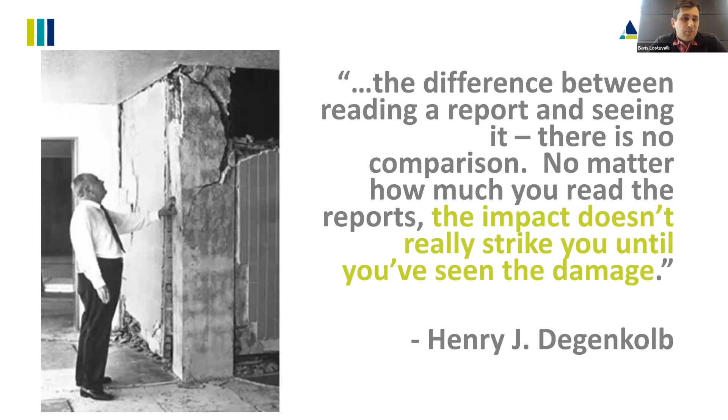Again, lots of words of wisdom, wonderful engineering insight, but that's really the difference. That's really why not only the Degenkolb team, but a number of other teams from the Bay Area, from the US, traveled to Turkey to really see what happened and how it compares to what they would predict from the report.

Again, the presentation outline is a quick introduction, and Adam and Jennifer will cover the ground movement and the typical construction practices in Turkey. We'll share with you the performance of the buildings of various product types. We will share some of the conclusions and lessons learned, and then we'll shift the conversation more to what it means to California. Obviously, we are expecting our big one sometime on the horizon, and how do we get ready for that risk? And in response, what can we do as an AEC community to better get ready and prep for the next big one here?

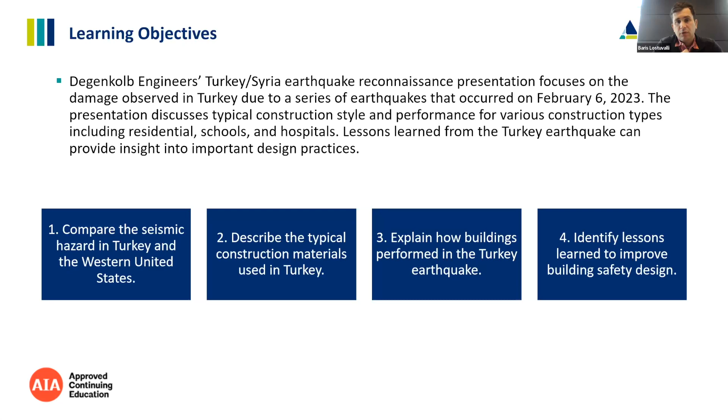And the learning objectives are really comparing the seismic hazard in Turkey and the Western United States, describing typical construction materials used in Turkey, explaining how the buildings performed in the Turkey earthquake, and identifying the lessons. And again, the learning objectives really are about unlearning what we know, revisiting our assumptions and relearning based on what we see in this kind of devastating event.

So, introduction to Turkey. Again, that's my homeland. Turkey is at the crossroads of east, west, north, south. It has been a crossroads for centuries. It has many different facets, the seaside, the archaeological sites, the historical sites, so a great place to see. And when you go to Turkey, you're gonna see many old structures still standing intact, doing fine for centuries, for millennia. So the question is, if they could stand this well after this long, why are we experiencing the devastation in the southeast of Turkey?

So with that, here's a quick summary. The Turkey earthquake is really two pretty big earthquakes, the 7.8 and then the 7.5. And these two earthquakes came about 9 hours apart, which really compounded each other. After the earthquake, close to 18 million people in Turkey and Syria have been impacted. The official death toll is about 55,000 and over 130,000 injured.

Millions and millions have been displaced from their homes. Probably more than 50,000 buildings are now in ruins or too damaged to enter. And if you look at the financial impacts, the UN is seeing over $100 billion cost impact after the destruction. So lives and the economy have been severely impacted after the earthquake.

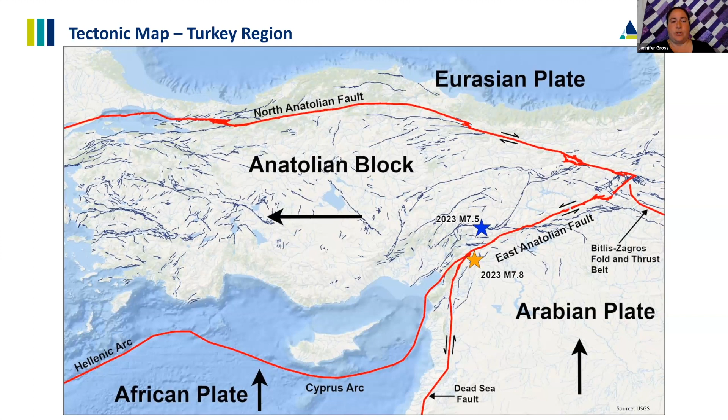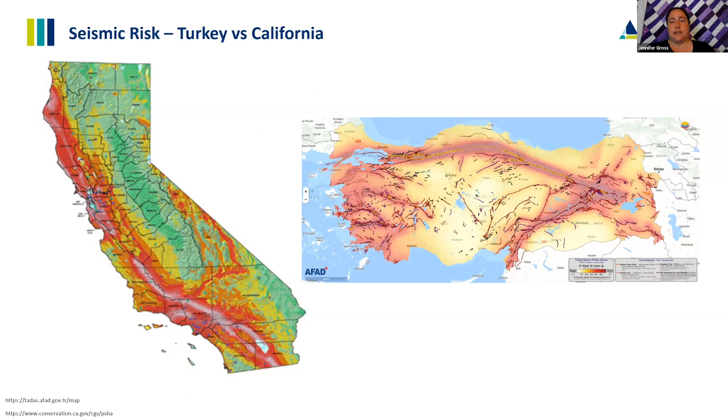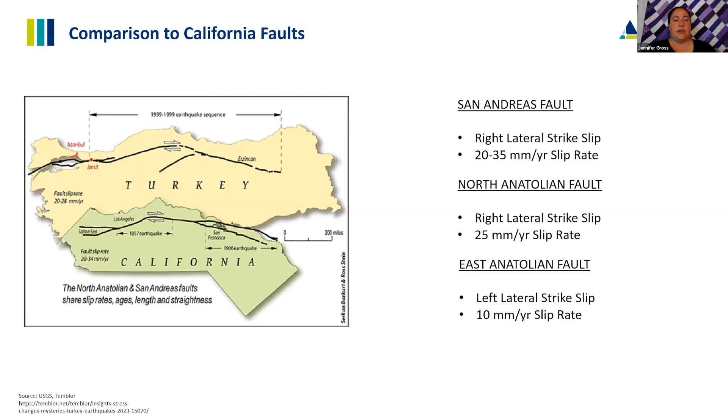Again, two very large cities that are due for large earthquake events. The East Anatolian fault that this earthquake occurred on is kind of similar to the Hayward fault in the Bay Area.

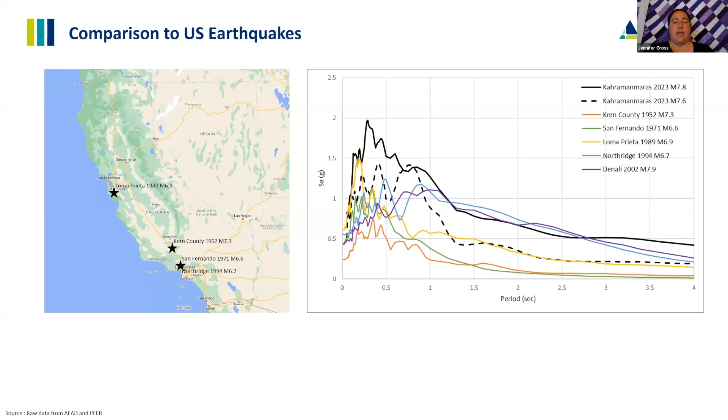What we really want to point out here is if you notice that black solid line has a higher y-axis value than any of the US earthquakes. So if you've been through one of those earthquakes and felt that shaking intensity, imagine what it was like in Turkey. This is a response spectrograph, so similar: period on the X, acceleration on the Y.

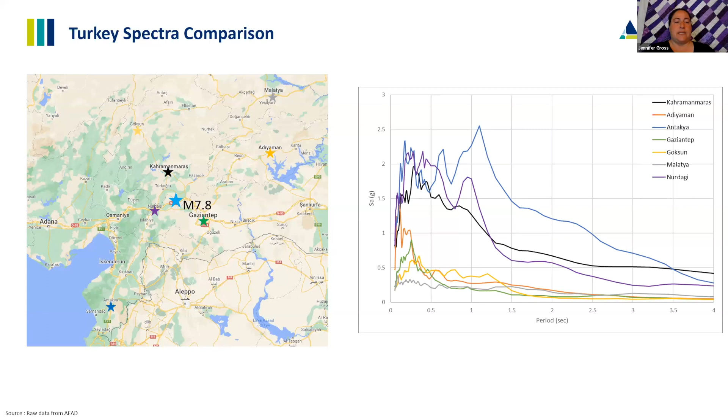Conversely, the green star for the city of Gaziantep is where we stayed during our trip. It had very minimal damage. Life was pretty much back to normal there. And really what this shows is that epicenter doesn't always mean the strongest ground motion. There's a lot of impact of soil conditions.

So what we want to talk about is the fault rupture that happened. And this was a very long fault rupture for this earthquake. It was about 200 miles long. So essentially the distance from San Francisco to San Luis Obispo, just trying to give context to the magnitude of this fault rupture. So not just buildings were impacted, the ground did actually move during this earthquake. And so that was evident in many places we visited.

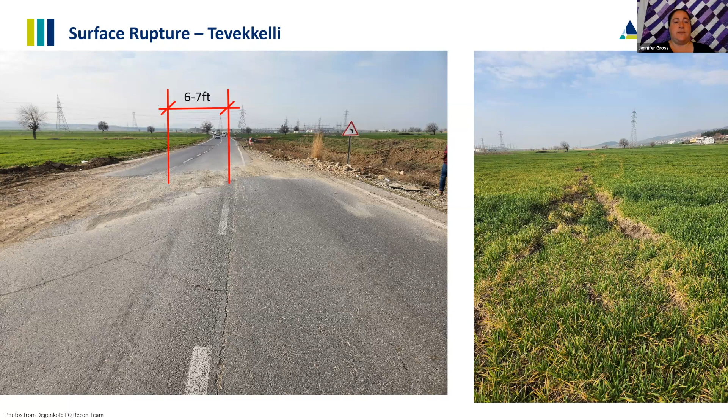So this is another example of that same movement of the earth in Hassa. And in the picture on the left, you kind of see that pile of rubble almost follows the rupture, the movement of the ground, just taking away everything in its path.

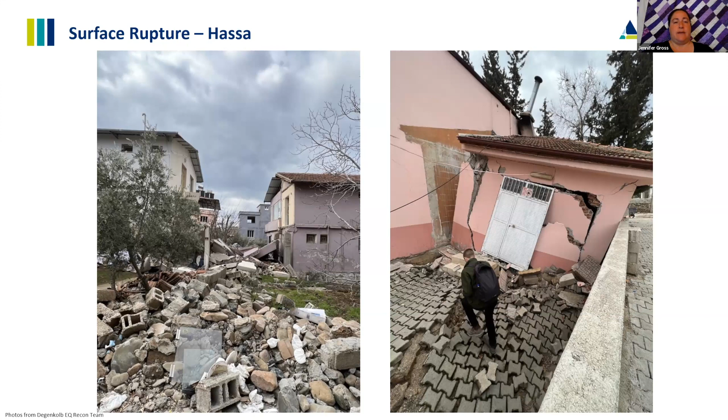And for the picture on the right, what's unique is this pink building is a school, and this rupture of the earth happened right between the main building and the mechanical building you see pulled away. And where Adam is walking used to be an area of flat pavers. And we saw movements horizontally of about 8.5 feet, but also 42 inches vertically, just to imagine the force and energy it took to move the earth that much.

So this is a unique area. We're not sure if this was really surface rupture or a landslide from the earthquake, but it's in the town of Tepehan. And what's unique is this picture that you're seeing is the after effect of the earthquake, but actually before it, this olive grove was all flat at the same elevation.

And according to CNN, this crevasse that occurred is 130 feet deep, 900 feet long, and 160 feet wide. When we were there in person, it was so huge, it was really hard for us to take a photo that did it justice.

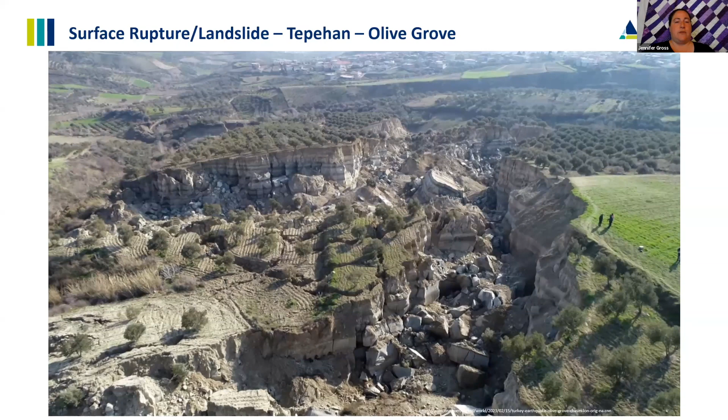So one of the other unique ground conditions that we saw in the town of Golbasi was liquefaction.

And so liquefaction is really when there's a high water table and loosely packed sediments. What happens is if there's a really strong ground shaking, it can actually cause the soil to lose its strength. And so in this town, for instance, there's a lake nearby, so we believe there's really high water tables. So what happened is when the soil doesn't have any bearing strength anymore, it kind of gives out.

And so what happened for this building is that it rotated 45 degrees and was really just stopped by the building behind it. And the picture on the left, what you're seeing is just what was buried under the earth before, the foundation, the bottom of the building. And the unique thing is that if you look at the windows, if you look at the building, it actually looks very well intact, just completely rotated.

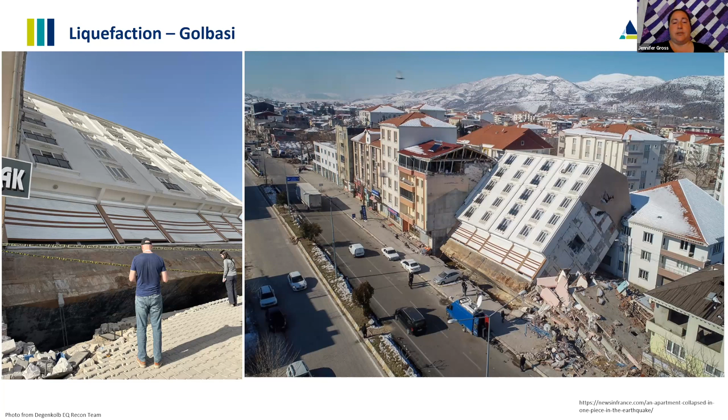And now I'll pass it back to Adam to talk further about our trip.

Thanks, Jen. So I'm going to talk a little bit about the building construction in Turkey, and then also about some of the damage. And the best place to start is with the picture you see in front of you, which is a very ubiquitous and very common construction type in not only Istanbul, but greater Turkey, and especially southern Turkey. This is a residential building. They're typically 5 to 12 stories tall.

They are concrete frame buildings where you have concrete columns, concrete beams and concrete slabs. And then they are infilled with brick infill or masonry infill. They don't use metal studs or wood studs like we do typically here in the States. So these create very, very heavy buildings.

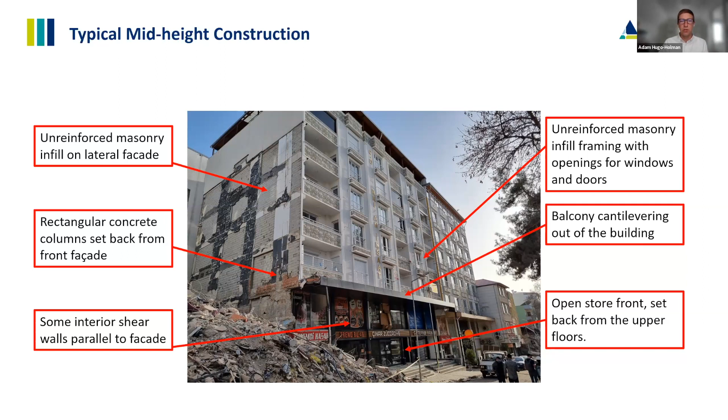The other thing to note about it is the open storefront below. This is also very common. They usually have a restaurant or retail downstairs, and similar to San Francisco, you want that space to be well lit with lots of light. So there's often lots of glass, and that heavy amount of walls and construction sort of disappears and it's just columns. And so you create an irregularity or a soft story in this ground floor, and it makes it very susceptible to earthquake damage.

Here's just a picture of the three varieties of infills. Again, they don't use metal studs or wood studs. We were joking with another engineer, go to their version of Home Depot and you won't be able to find a typical wood stud. You find blocks like this.

There's three varieties. There's a clay infill, which is a very light, brittle, sort of what you see up on like a tile roof. There's aerated block, which is basically very light concrete. And then the last one is the CMU block, concrete masonry block. And they will use these often interchangeably, but the takeaway is that they make these buildings very, very heavy and very, very stiff.

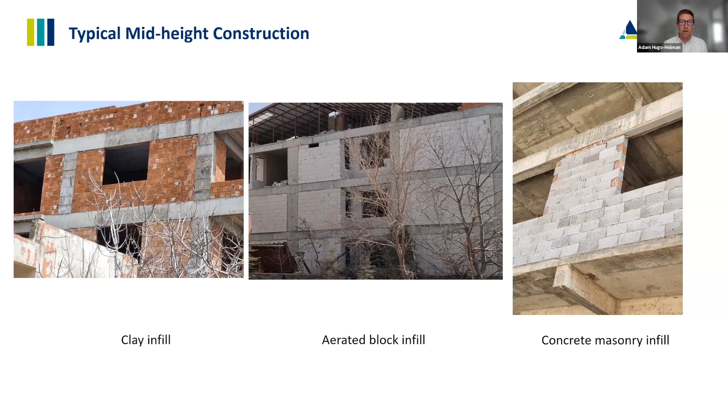Now let's talk about codes. There's a lot of similarities between California and our seismic codes and the Turkish seismic codes. There's a lot going on this slide, I apologize, but let's focus in on the horizontal line that runs across the middle of the page. So in the 1930s, Turkey, following a large earthquake, implemented their first seismic code. Similar to the United States, similar to California, where we implemented our first seismic code in the early part of the 20th century.

And there were multiple updates through the first half of the 20th century, all the way up until 1975, at which point they introduced seismic detailing, basically the way that we would tie bars in their concrete buildings. It was introduced, it wasn't enforced. So the implementation of it was mixed. And there were no real updates of that code until approximately the year 2000, at which point they switched to more US-based codes. They used ASCE 7, which is what we use here in the States, and have now been implementing code updates on a 10-year basis. So they had one in 2000, 2010, more or less, and just recently.

The thing to think about with this, why it's important, is the blocks on the bottom side of that chart show rough percentages of buildings that are in place now. And approximately 60 to 80% of all buildings were built prior to 2000. So the chance of having buildings that have zero seismic detailing or minimal seismic detailing is very high. I saw another chart yesterday that talked specifically about residential buildings where it was more like 50% of the buildings.

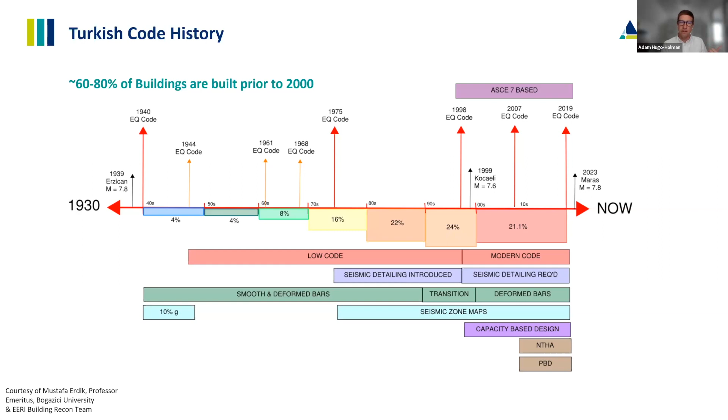In Turkey, smooth bars were in wide circulation up until the 90s, and then phased out through the 90s, and now they aren't really used. So any building built before 2000 has the potential risk of not having proper detailing and potentially smooth bars, and that combination can be very deadly.

I think collectively, within our team and with others we've talked with, we believe this number is probably quite low. Based on our brief walk through southern Turkey, we think the number is more like 25 to 30%. You need to let that sink in for a second - that's 1 in 4, 1 in 3 buildings in a very large swath of area that you will lose. And really, the evidence of walking around bears it out. It was absolutely devastating to so many communities across southern Turkey.

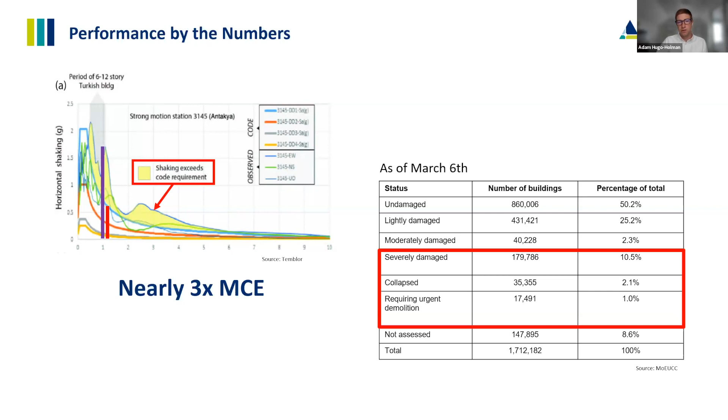So now talking about the performance, I'll go by building type. Residential buildings by far performed the worst. As I mentioned, the unique aspect of the force demand and the detailing is why we think these buildings performed so devastatingly.

The reasons why these did so poorly: the earthquake demand was so much higher than the design, the potential for irregularities with ground floor storefronts or restaurants, the lack of - or potential lack of - detailing given the age of construction. And there were instances, as reported in a lot of news media, of poor construction. It led to real devastation. This earthquake happened at 4 a.m.

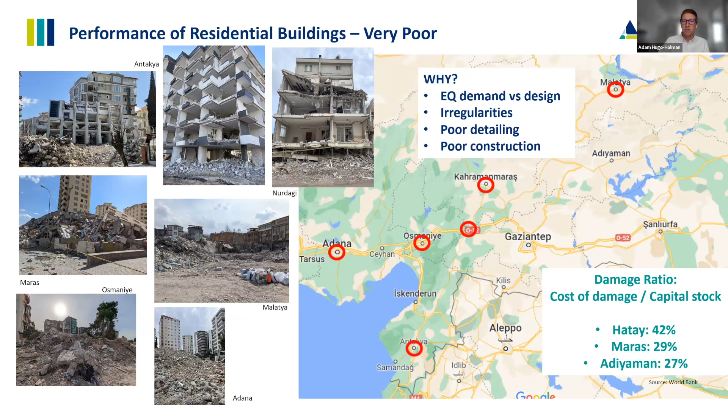You have to imagine people were sleeping in their beds, getting up, having a cup of coffee, getting ready for the day, and the world crumbled around them. It happened in 90 seconds, this level of devastation. It's something that I don't think, and I'll speak for the people that were there, you cannot comprehend. It's just unimaginable.

One of the bright spots, I think, was the performance of school buildings. A couple things to highlight about schools in Turkey, and especially in southern Turkey. I was not familiar with this practice here in the States. It's typically a template design, given that the code has a couple of designs that people can just use off the shelf. And from what we were seeing as we walked around all these cities is that it was pretty well implemented. A lot of these buildings were the same building, kind of copy and pasted, and they performed actually fairly well.

So you ask yourself why. Well, one is, there's school buildings, so there's lots of classrooms, so there's lots of walls, lots of transverse walls, typically a corridor down the middle, which had lots of walls. So there was a lot of strength and stiffness in the buildings. They didn't have any irregularities. They didn't have the ground floor storefronts. They were just very typical buildings. We sort of joked it's how an engineer would design a building, not an architect. It was just a very boring building.

They also usually had better construction quality. Just having the visibility of it being a school in the center of a community, there were more eyes on it, and likely it was constructed in a much better way. And lastly is back to that response spectrum - they didn't see the level of forces based on their height that the residential towers have.

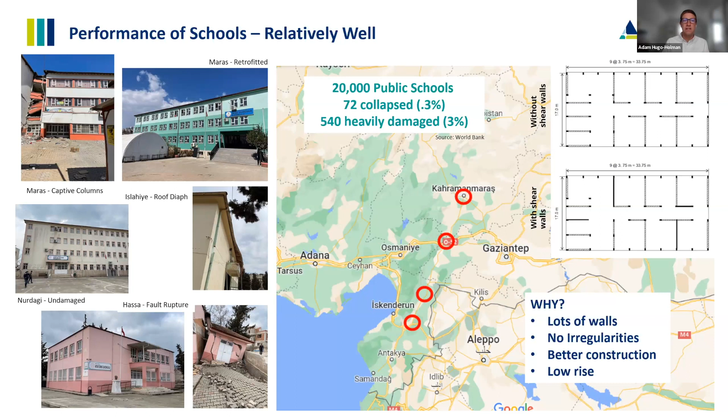One last thing I want to highlight, and this was sort of a bright spot. The green building in the top left was a building that had just been retrofitted, and it was in the town of Maras, and the town had been completely devastated. We saw this building, and it stood out to us, and we said, what's going on here? The building had just been retrofitted, and the principal and the school officials were so excited to show us the building, as they should be, because it was great to see that seismic design can work. When you implement retrofits and fix these older buildings, they can perform really, really well. It was really great to see.

Government buildings, also similar to school buildings, generally performed fairly well. Again, you ask yourself why. They didn't have the irregularities typically. They were just very typical buildings all the way down to the ground, no storefronts. They were also very often newer buildings - they looked like their construction was probably 5 or 10 years old, so incorporating the new seismic designs. They were obviously engineered by structural engineers. Again, more scrutiny so the construction quality often appeared to be significantly better.

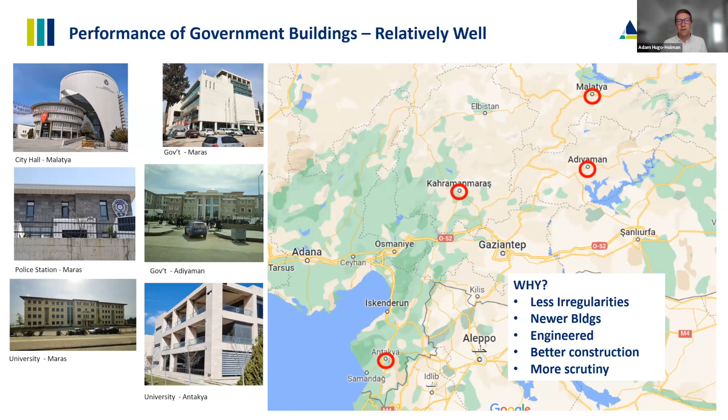The only building that we saw that was abandoned was at the top left in Malatya, but that was more because there's a big architectural feature that had some slight damage. The building itself looked to be in very good shape.

The other thing I want to talk about is infrastructure. This is a slide I got a lot of this information from the EERI team, which is a research institute based in the East Bay. They sent several teams, surveyed a lot of the infrastructure - bridges, dams, electrical power lines. The general synopsis was that overall they performed fairly well. I think only one dam had to be drained or have its water level lowered. Some experienced damage, but nothing severe. A lot of the power lines were still standing. The only time they fell was when there was a surface rupture underneath them, or a building fell into the lines.

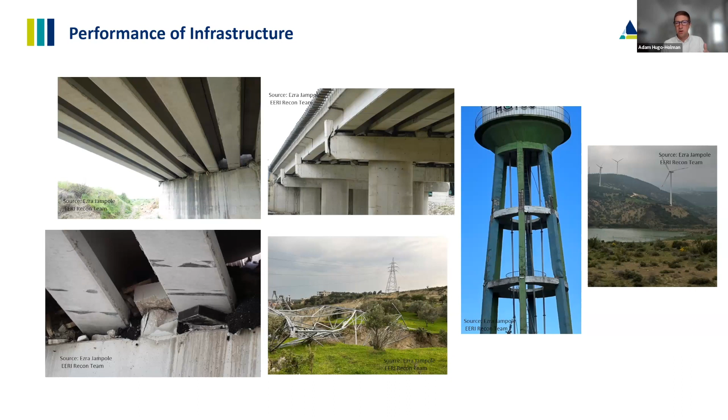When we were there, cell service was good. Roads were sort of back up and running. We didn't have any issues. There were some landslides that inhibited some traffic, but generally the infrastructure seemed to perform fairly well.

Okay, now I'm going to hand it back over to Jen.

One of the building types that we really wanted to dig into when we were in Turkey was hospital buildings. Between the two Degenkolb teams, and an EERI-focused hospital building team that one of our colleagues was on, we visited 31 hospital buildings.

So what you can see on the map is the color coding of our observations of damage for these buildings.

Hospitals are very similar in construction to other types of buildings. They're mostly concrete frame or shear wall with masonry infill. Modern Turkish code does use a higher importance factor for hospitals, just like we do in the United States.

One thing we thought was really interesting is that base isolation got mandated about 10 years ago for new hospitals with more than 100 beds.

As you can see with the chart on the bottom right, looking at the damage, the base isolated buildings, as we would expect, did very well. But also important to note is that the majority of the buildings we observed, regardless of base isolation, fell into that no damage to moderate damage range, which again shows that the higher importance factor and the importance of the structure really helped with well-performing hospital buildings.

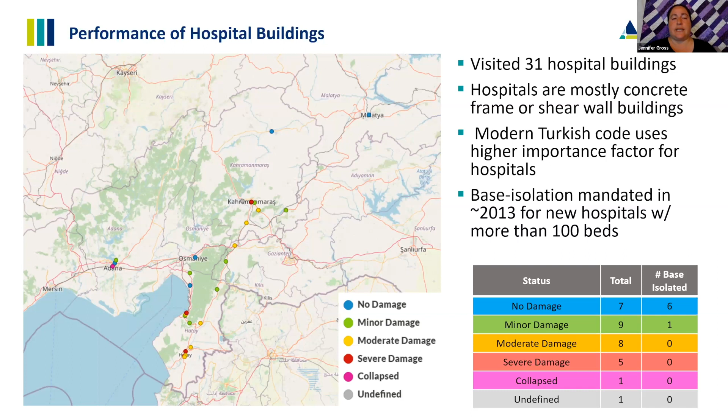Now we just wanted to go through the next couple of slides, some case studies of the hospitals we visited.

This hospital in Malatya is the University Teaching Hospital. It's 6 stories with 2 basements, and it is base isolated. It had little to no structural damage, but there was some non-structural damage.

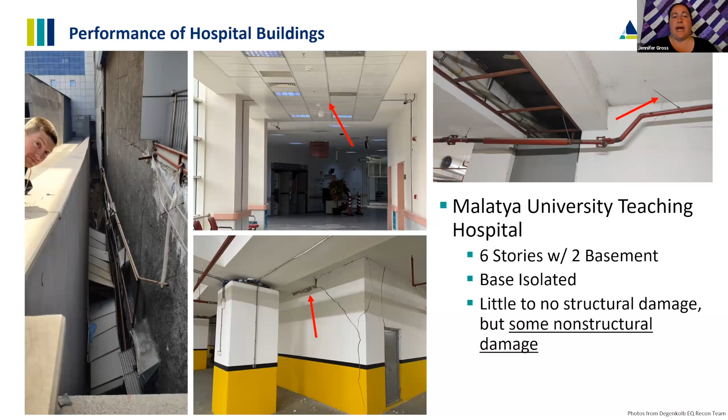The picture on the upper right is of a fire sprinkler line crossing what we call the moat - that open area looking ceiling is where the base isolation is, giving it movement. What happened is while the fire sprinkler line itself was given the ability to slide and move as it wanted with the building, putting the hangers on each side accidentally restrained it at each end. So when that fire sprinkler wanted to move, it ripped the hangers off the attachment.

Another hospital we visited was in Erzin, a 4-story hospital with 1 basement. We saw some structural damage, but more so a decent amount of non-structural damage.

There were some pipes that broke; the picture on the upper left shows the clay tile sliding off the high roof and falling onto the low roof. The picture right below shows the gable masonry wall collapsed, and the roof itself didn't really have a great lateral system. Also all the equipment attached to it wasn't braced.

Some unique highlights: in the picture center bottom are the elevator motors, which weren't anchored, and we would have expected to see a lot of movement and sliding, but we didn't. The photo on the upper right shows ceiling damage, which was typical.

But overall, most of the damage is non-structural or damage you'd think is repairable. But the building itself was inoperable - it was abandoned.

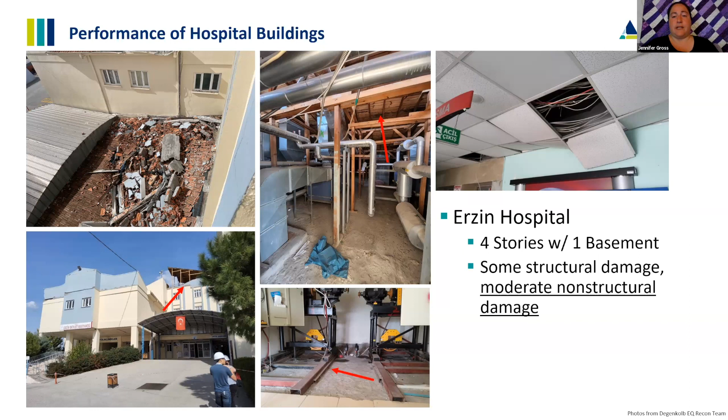From talking with the security and maintenance team that was there, it's likely that the building is going to just have a new hospital built next to it that's a 50-bed hospital, so they're not really trying to salvage this building. This hospital is in Marash, and it's 7 stories with a fixed base.

It had moderate structural damage, but significant non-structural damage to the facade and the masonry walls. It was evacuated, and when we were there a month later, it was still inoperable. This picture shows a zoom in, especially at that lower level, of the damage to the facade and infill walls, as well as air conditioning units that fell off the wall onto the ground.

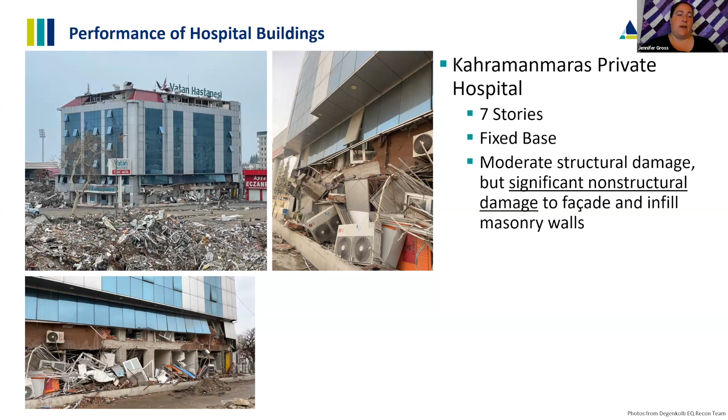This hospital in Turkoglu was 4 stories and fixed base. What was really unique is when we got there, we could tell the building had been abandoned and no one was there, but we really didn't see any structural damage. The story was more when we were able to get inside the building and see the severe non-structural damage.

These photos conveyed something that really shocked us, everything that had been attached overhead was on the ground. All the heavy masonry infill walls had shifted onto the floor. Some of the stairs were even impassable.

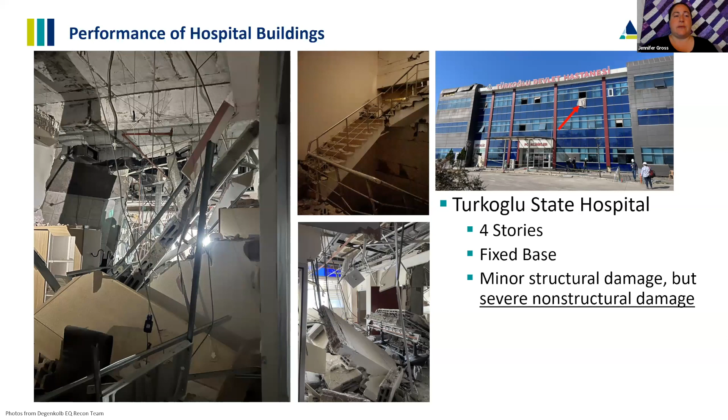What this means is that, like where you can see the photo with the arrow, there's a sheet hanging out the window. We heard that occupants had to rappel out the window to get out due to blocked egress paths. So this hospital was inoperable because of its non-structural performance.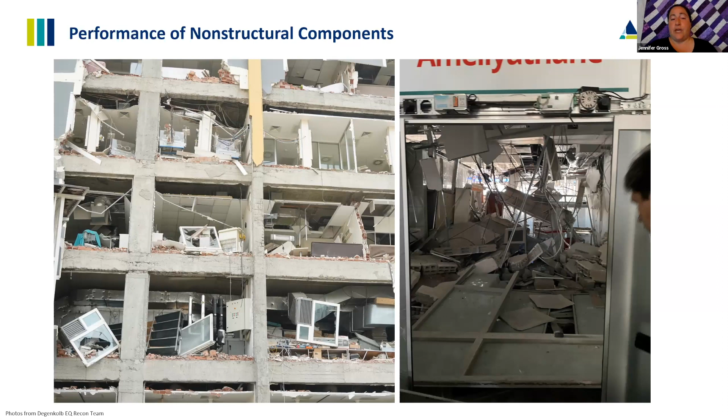Both of these pictures again show non-structural component issues within hospitals, ranging from equipment anchorage issues to suspended ceilings and infill wall damage. What we want to drive home is that because of non-structural component damage and failures, these buildings are likely to be demolished, even though the structure itself performed fairly well.

Now I wanted to wrap up with some of our conclusions and findings from our observations. One of the things we wanted to touch on was soil conditions. While there are bad buildings that will suffer damage, these high concentrations of damage that you can see in these maps really point to larger issues with soil conditions and pockets of poor soil. So again, soil conditions make a big impact on building performance.

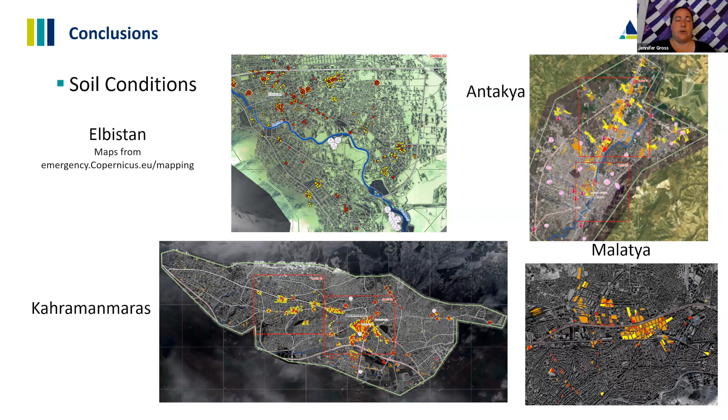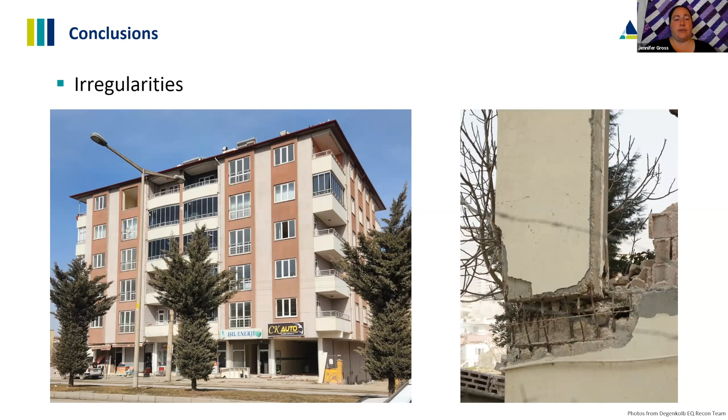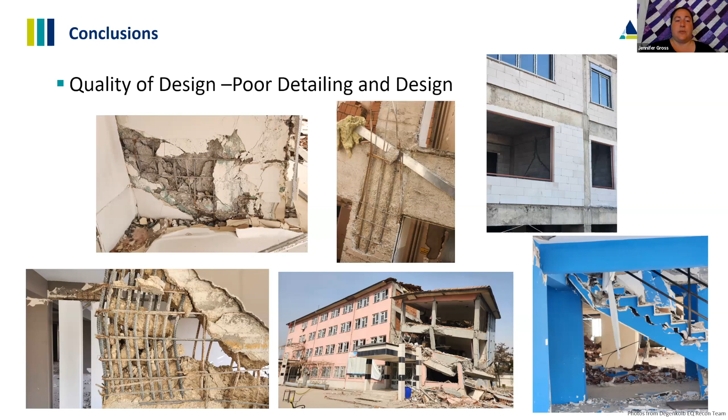Again, this drives home the importance of good detailing and design. We saw evidence of poor detailing and design, whether that's how long the rebar was, how well the rebar was confined, or how well it was detailed. The important thing to think about is that in the US, we've changed our code since the 70s in terms of detailing and how we confine concrete. Older buildings don't have the same level of detailing that a code-level building built now would have, so newer buildings are detailed better, both in Turkey and in the US.

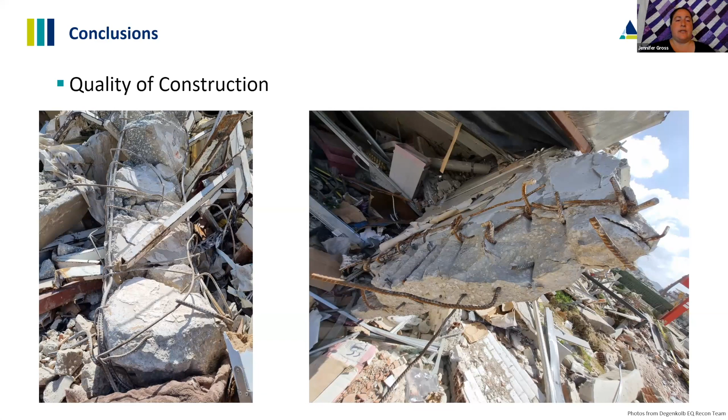We wanted to show some photos noting issues with quality of construction. In these photos, what you're seeing is that the concrete and the rebar should really act as one and be adhered to each other. In these photos, you see the rebar almost just rips right off of the concrete.

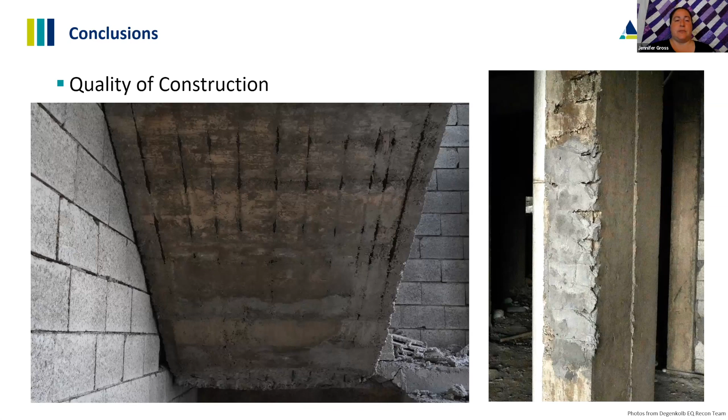In these photos, while these elements are intact, the fact that you can see the rebar peeking through shows it doesn't have a lot of clear cover, which means it's really susceptible to elements, water, and damage, meaning the rebar's capacity and strength is not what was designed for.

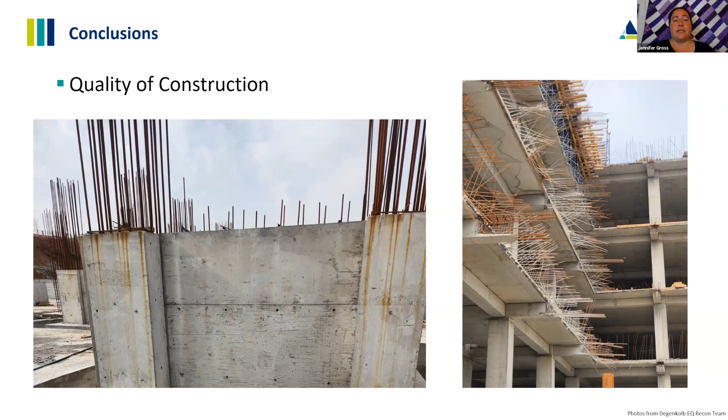Even this base isolated hospital building that we saw under construction, you can see that the rebar already has rust and damage to it before the building's even finished being built. And for quality of construction, we also saw a plastic bottle basically poured into the concrete column while the building was being built.

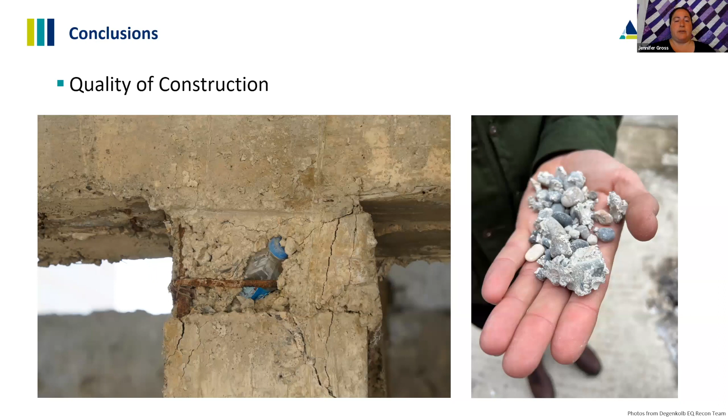The photo on the right is actually, Adam took a piece of concrete and crumbled it in his hand, leaving just a couple pieces of the aggregate rock. So just not the quality of concrete we would have designed for.

So again, this shows the importance of thinking about and being concerned about non-structural damage. Non-structural damage is the reason some buildings are likely to be demolished. In the US, especially for hospitals in California, we're very careful about bracing and anchoring equipment and non-structural components, but that's not necessarily happening for other building types, maybe office space. And even for buildings where non-structural stuff is being anchored, what's the level of inspection of that versus the structural components? Now I'll pass it back to Adam.

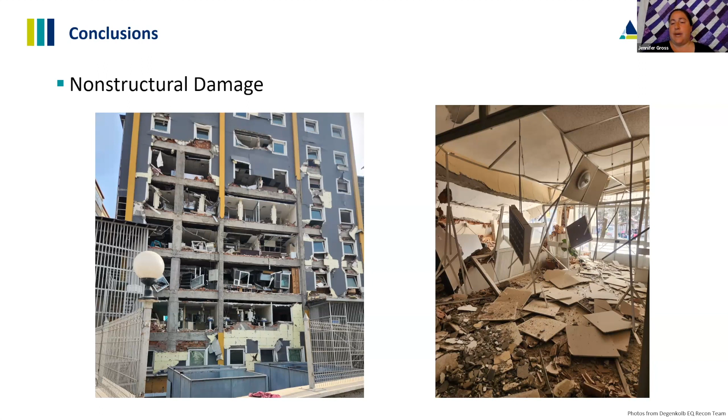Thanks, Jen. I think it's important to ground this back into the West Coast and understand what this actually means for us. We often think about earthquakes happening in different parts of the world and push it off, thinking that doesn't really apply to us. I think it's important that we take a second to reflect on what the risk is here in the Bay Area and especially in Southern California.

The USGS has done several studies on the potential for and likelihood of earthquakes happening here in the Bay Area, and as you can imagine, the risk is very, very high, and not for very small earthquakes—these are very large earthquakes, and the potential for them is very large. I think we need to recognize that risk and realize an earthquake could happen tomorrow. Are we ready for that?

The other thing I think is important, tied to what happened in Turkey, is this idea of the 1-2 punch, where two earthquakes happen in rapid succession. In Turkey, they were 9 hours apart. In the Bay Area and Southern California, it isn't really one single fault that goes through our area—it's a multitude of faults. In the Bay Area we have the San Andreas and the Hayward fault, and those interact with each other. As one releases stress, it could redistribute that stress to another fault, giving the potential for something as devastating as what happened in Turkey.

I think it's really important to think about this, because that risk is real, and the potential for a 1-2 punch similar to what happened in Turkey is something we need to acknowledge.

The other thing we often try to dismiss is that maybe the construction type and the poor inspection or construction quality that happens in Turkey isn't something we have to worry about. We have a much stronger construction industry, and we do, but there are still old buildings that pose a risk in our society. The Chronicle published an article shortly after this earthquake discussing that in San Francisco alone there are 4,000 non-ductile concrete buildings. Those are very similar to what we saw in Turkey, these concrete-heavy buildings, and they pose a real risk in our society.

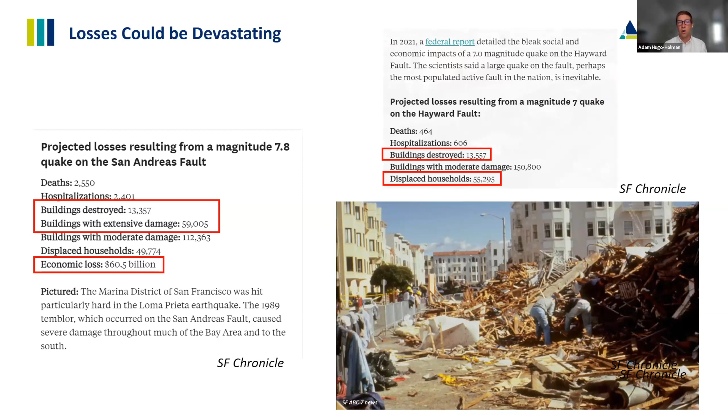Turkey and the United States, and California specifically, have a shared history of earthquake damage. We learn from each other. A lot of great structural engineers live and work in Turkey and also come to the United States, and we go there and we share a lot of the similar design philosophies and work together.

And because we have this shared risk, we've experienced earthquakes for a very long time, and we continue to try to figure out ways to design for them. We're tied at the hip in the sense that we need to work together and learn from their earthquakes in the same way that they learn from ours.

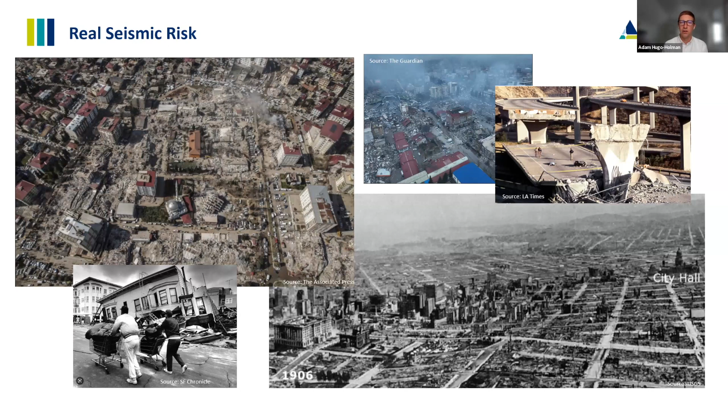The last portion of this presentation is more about what the broader community can do. What do we think about, and what do we take home from the lessons of this earthquake and incorporate into our practice? And I think the first one is working together. I think too often in our construction industry, we see each other as adversaries, and we try to sort of defend against what others are telling us to do. And I think that's not really the spirit.

I think we need to continue to work collaboratively together and innovate in how we can improve our construction practice and industry to make our buildings safe. And that's working on codes, that's having high quality contractors, working with our engineers, and working together to make sure not only that we have high seismic performing buildings, but also doing it cost effectively, being able to innovate our way into making better buildings for our communities.

The other big takeaway was caring for all buildings. I think during the pandemic, we sort of reevaluated what the word essential workers meant. And I think we need to think about what that means for our buildings as well. I think we need to reevaluate what an essential building is. We've spent a lot of time and money, and it's been well spent, on protecting our schools and hospitals.

And in this earthquake in Turkey, we saw those buildings often perform very well, but they were often surrounded by a community that was completely devastated. And so they had nobody to serve. What good is a school if there's no kids that can go to that school? And I think we need to think about that here. Do we design our buildings that are our homes or our offices or our grocery stores and think about what their seismic performance is and what it means if they were offline for a very long time after a big earthquake?

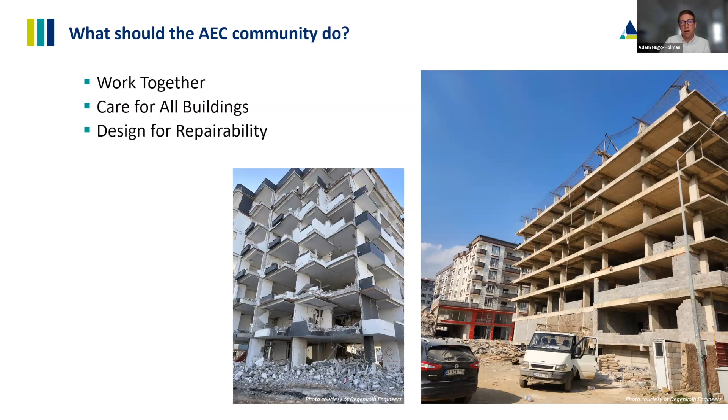Which actually ties to my next point here, which is understanding the risk. I think there's a big disconnect between the structural engineering community and the broader community. The code requires buildings to be life safe, and we design for life safety. And what that means is that you can get out of the building safely after an earthquake. My perception is the broader community thinks that their buildings will be back up and running shortly after the earthquake.

There's thoughts of, well, we made it through Loma Prieta, we did okay, and my building was designed to code. And not taking into account that, one, the design parameters that we use will potentially have your building out of service, not working after the earthquake happens. And that's if it's built to a current code; if the building was built in the 1970s, you have a much higher risk.

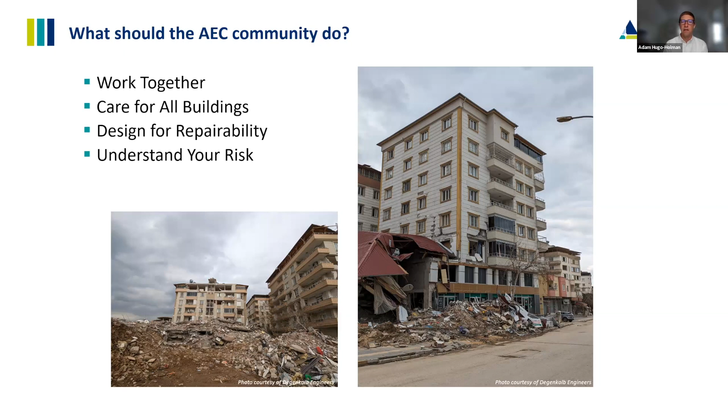And so I think we as a community need to better understand what risk we have in our building stock. Whether that's working with an engineer or working with others to figure out, okay, when was my building built? What codes was it designed to? What's the expected performance of it? Well, there's a lot of innovative tools that we have in our community to understand that risk and evaluate that risk, because you can't really tackle a problem that you don't fully understand.

And my last slide is about community resilience. Like I said before, there were so many instances where entire neighborhoods, entire cities and villages were completely devastated. And in many cases, they were talking about having to pick up and just completely move the city. And I think it's just so devastating when that happens to an entire city.

And I think we need to think about what that means for here in the Bay Area and especially in San Francisco, where there's a lot of older buildings, and the risk that we have in our communities of really being shut down for some time after the earthquake.

And I want to take this opportunity to give a shout out to UCSF and the work that they've done in taking seismic hazard seriously and pushing us, the structural engineers, to think differently about how we design buildings, looking at multiple different hazards, and making sure that they're designed well and collaboratively with the full design team.

And with that, I think that's all our slides. I want to thank you all for giving us the opportunity to share our findings and what we saw in southern Turkey in this incredibly devastating earthquake. And if there's any questions, Margie, maybe you can help us weed through those so we can answer them. Thank you very much.

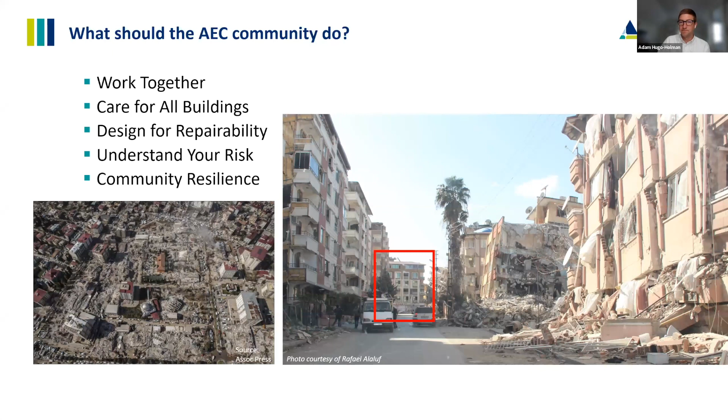You bet. Thank you, Adam. Thank you, Jen. Thank you, Baris. This is in some ways a very difficult presentation to look at this much devastation, but I think you've outlined for us lessons we can learn, and sometimes facing that devastation is the most important thing that we could do.

I guess I would have a question, and I'd like each of you to respond to it: if the governor was on this call, Governor Newsom, what would you tell him he should be thinking about for California and putting in place so that we don't see this level of devastation in the state? It's a good question.

I guess maybe I'm off mute.

So I would say, one, I think we need to do a better job of pushing forward the retrofit ordinances. I know a lot of cities are really starting to take those seriously, and I think we need to do a better job of getting those in place, because right now we do know how to fix them. It's more about the cost and the level of effort and displacement and swing space of people moving out of those buildings to get those retrofits implemented. So I think we need to keep pushing forward on those ordinances.

So building on Adam's point and remembering that three-leg stool and the way he was putting safe buildings, also high-performing buildings, we really need to revisit and rethink and revisualize that concept of high performing. Again, there are a number of factors about structural performance. There's also sustainability, resilience. There's so many factors in how we are approaching design, engineering, and construction practices.